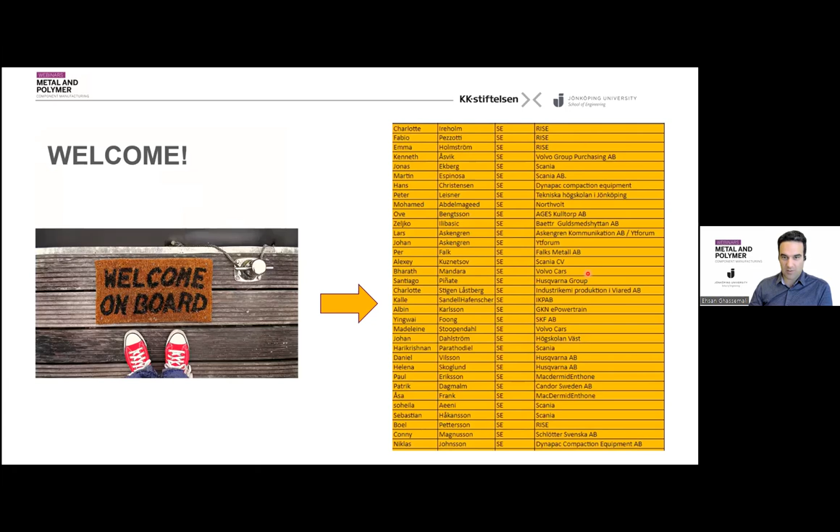As mentioned, this is webinar number 30 from the WebLearn project. WebLearn is a project funded by KK Stiftelsen as well as Jönköping University, with the aim of conducting focused and spot-on webinars related to metal and polymer component manufacturing. Since September 2020 the project has been running, and it will continue until the end of this year. Within our department at Jönköping University, we have a plan to continue the activities based on this project even after the project ends.

We have been conducting more than 30 webinars, almost every 2 weeks since the beginning of the project, related to metal and polymer component manufacturing, and we will have a few more until the end of this year as planned. You can read more about the project at the address provided in the slide, ju.se/weblearn.

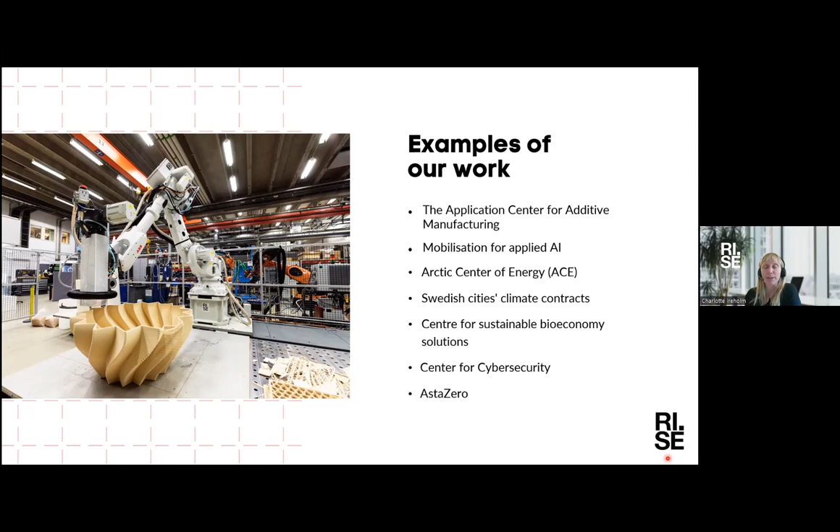Some examples - I mentioned that we have a lot of different test and demo facilities, from AI to additive manufacturing. Yeah, there's a wide range of different topics.

So we are these 3,000 people divided into 5 different divisions: Bioeconomy and health, digital systems, materials and production, built environment, and safety and transport. And materials and production, that's where you find us.

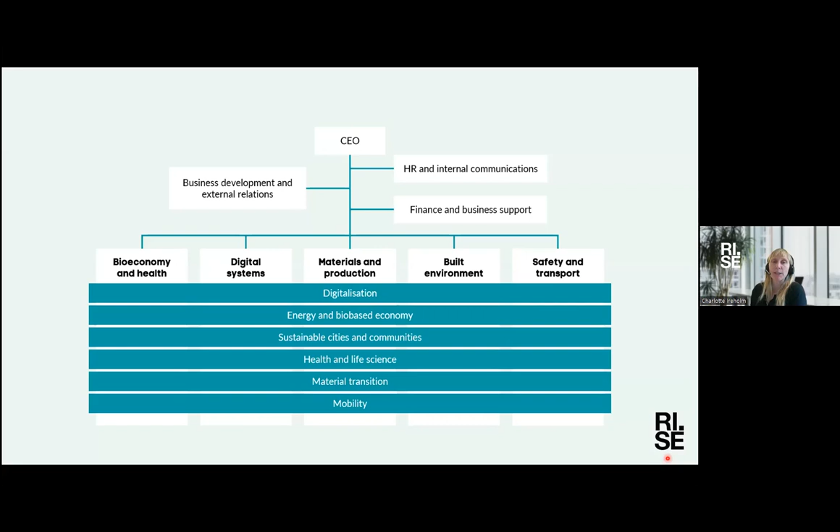So we work with manufacturing processes and more specifically surface technology or surface treatment. And here you find me, Fabio, and Emma.

So me and Fabio represent surface treatment, where cleaning normally is the first part, and then we have following steps with application of different coatings, for example, and also we work with the evaluation of the final surface - different surfaces with different coatings or surface treatments on them.

We didn't say if we were going to present ourselves more specifically, but maybe a few words then. I will give the word to Fabio and Emma before we start on the cleaning part. So I've been working here at RISE for 7 years, more with the surface treatment processes and application of paint and powder coatings and so.

As I said, the cleaning steps, or before you start doing any treatment of the surface, you need to have a proper clean and good surface. And we work with all types of substrate materials, so plastics, metal, composites or so.

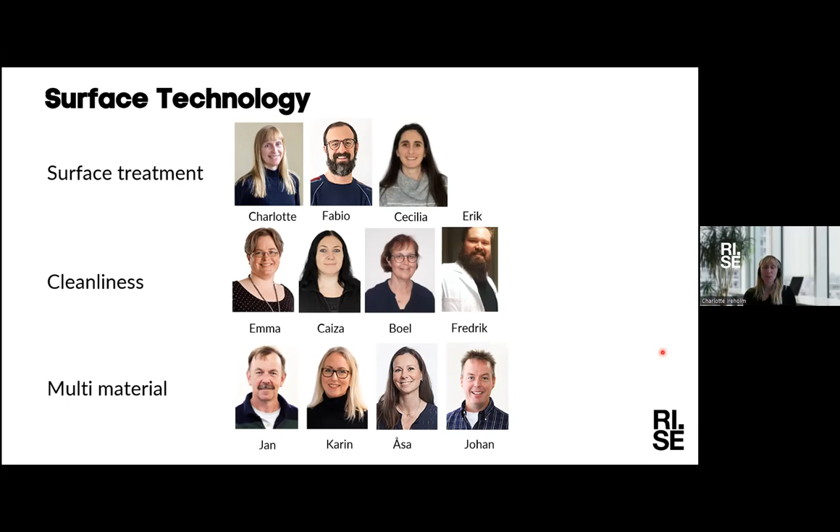Yes, so then I think we can start with the cleaning topic.

I think you have now control. I should have the control. Yeah, and now I can mute and unmute again. That's nice.

Let's see, industrial cleaning. Yeah, now I can change. So, hello everybody. So why is cleaning important?

During a lot of manufacturing processes, you can say that there are different materials that are applied to the substrates during the production. This can be very different depending on the manufacturing process, but it can be from oils, emulsions, lubricants, and those, after the manufacturing process, these materials have to be removed.

Other types of pollutants or contamination that is important to clean are produced during the manufacturing processes, and these can be chips or particles coming from the components or the pieces that are manufactured, or it can also be from the formation of oxides or other species that are produced during the different processes. In many cases, or I would say in most of the cases, all of these contaminants must be removed before the next process or before having the final product.

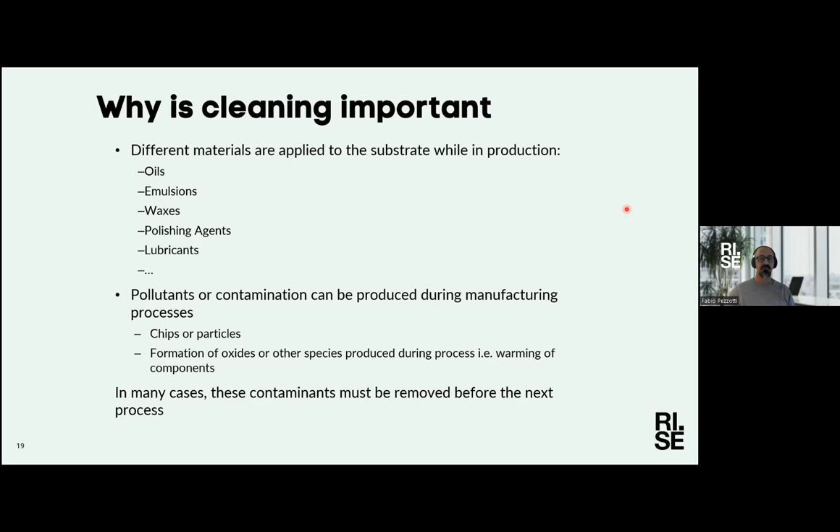Just as an example, this is a little bit of a flow schema of production of gears, the manufacturing process. And as you can see, in all the different processes there are lubricants or emulsions that are added during the process that will need to be removed in the different stages afterwards for cleaning, before the packaging or before the final product is sent to the customer.

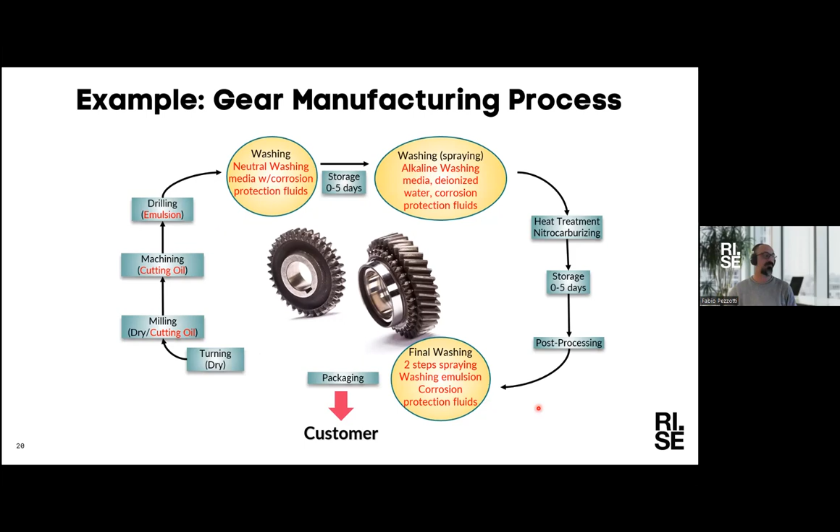It can be from cutting oils, emulsions. It can be, some of the components can come from the washing steps, where some of these previous contaminants are intended to be removed. And also it can be in the final washing steps where you have some washing emulsions or some corrosion protection fluids, especially for metallic components.

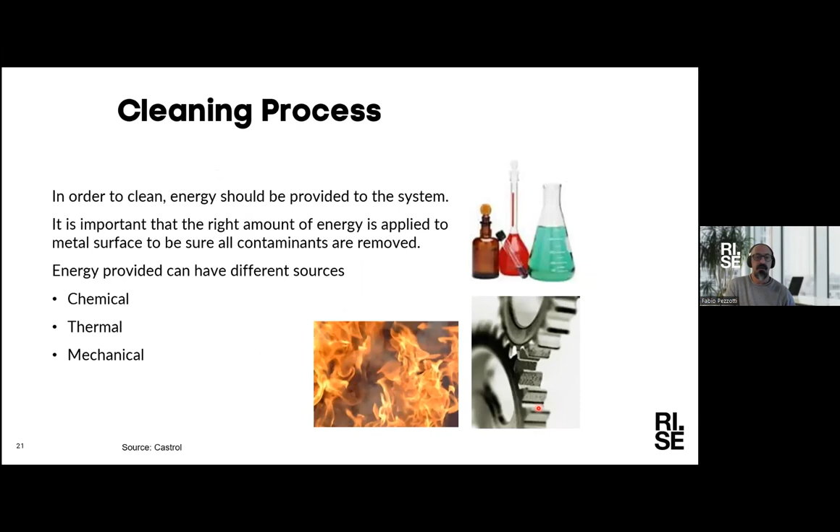So in order to clean or properly clean the components, energy has to be provided to the system, and this energy can be provided in 3 different ways. It can be chemically, thermically, or mechanically.

It is important that all of these 3 different types of energy, together with how long the components or the parts are going to be cleaned, be correlated. The physical forces or the mechanical energy put into the system in order to clean can be applied by spraying, by agitation, dipping. There are different mechanical methods used for cleaning components.

Regarding the thermal force, it is combined with the temperature at which the components are cleaned, and this kinetic energy allows a better cleaning of the systems. The chemical force is a more molecular cleaning, as there are some chemicals that can improve the desorption or the dissolution of some of the impurities in the system.

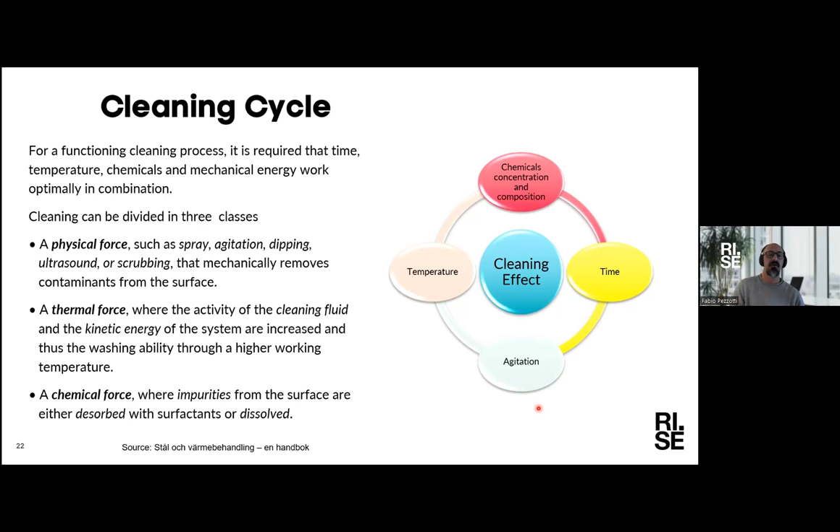So in order to have the optimal or a good cleaning cycle, all these cycles must be complete. The total energy in general has to be more or less the same, but it can depend or vary depending on which type of contaminants, which type of components. At the end, the total amount of energy should be more or less the same.

So you can split these different types of cycles or stages depending on the needs of the component. In some components you might need more chemical washing or chemical energy, in others you might need more time, but at the end the cycle must be complete and it should use approximately the total amount of energy.

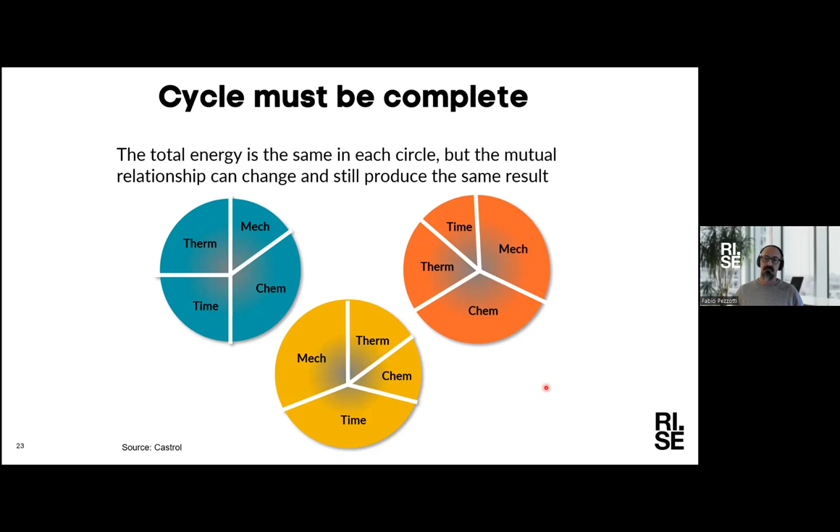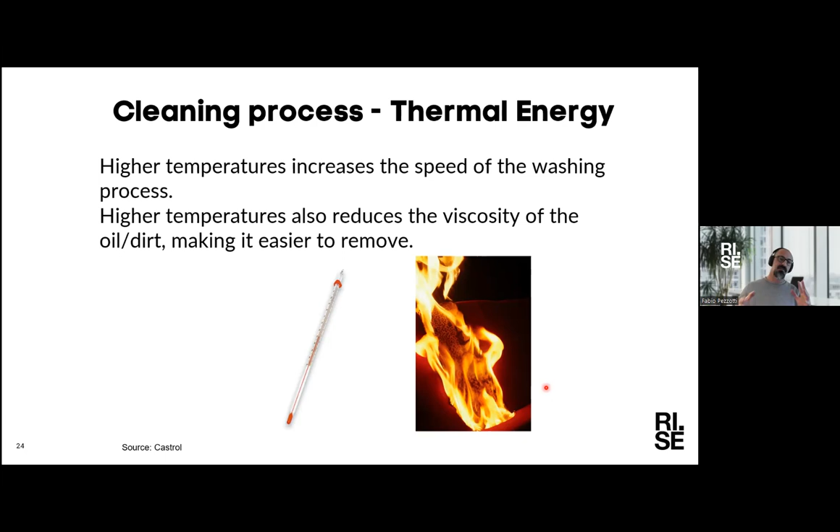Regarding the thermal energy, it's very related to the temperature at which the cleaning process is held. At higher temperatures it increases the speed of the washing process. It can also reduce the viscosity of some of the contaminants, in this case oil, dirt, and make it easier to remove. One of the drawbacks with thermal energy is that higher temperatures mean you will require more energy to the system, and this could not be the most energy efficient. But as I said before, it's all a balance between the different stages in the cleaning process.

The mechanical energy used for cleaning can come from different types of process: spraying, shaking, brushing, or ultrasound. There are also other mechanical methods that can be used, and it will depend a lot on which type of process you are running, which type of components you are running.

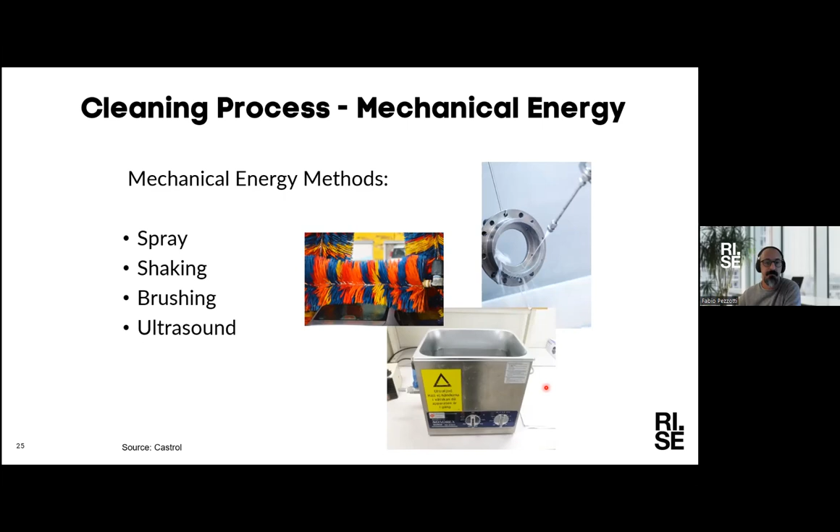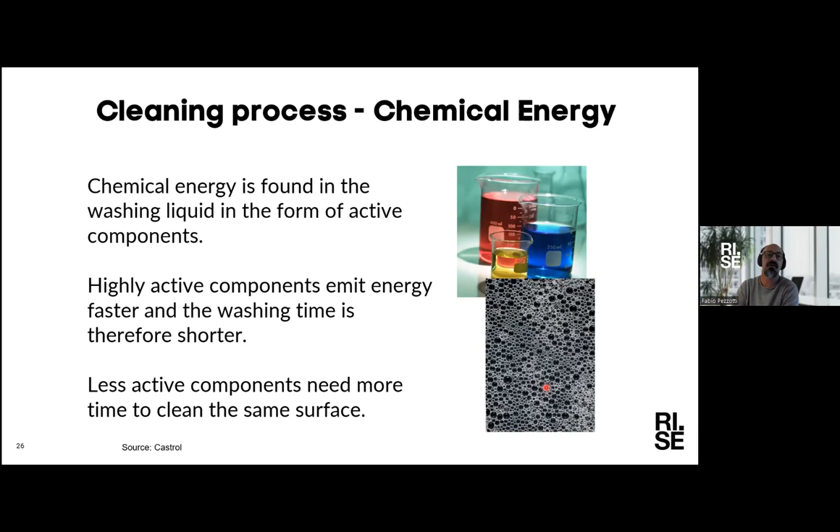Regarding the chemical energy, basically it is found in the type of washing liquids you are using, and how they interact with the contaminants, oils, or emulsions on the surface of your component. Depending on the activity, or how they give this chemical energy to the system, they can be more active components or less active, depending on the chemistry and the compatibility with the system.

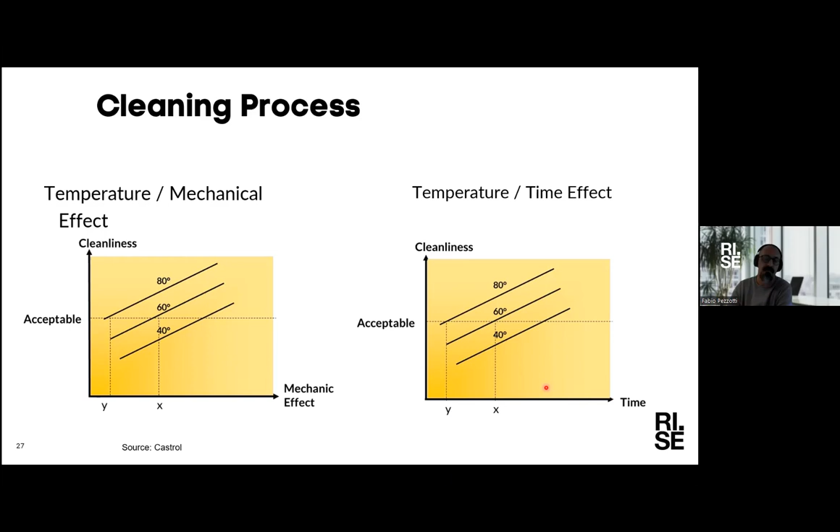These 4 types of cycles or stages need to be correlated. There are correlations between the temperature and the mechanical effect, and one should find which is the most acceptable, where to put your process parameters in order to have the best or most acceptable cleanliness. The same runs for temperature and time effect. Depending on how much or how little time you have in the process, you can achieve a more acceptable cleanliness.

Something regarding the chemical energy that needs to be provided to the system has to do with the strength of the binding of the contaminant to the surface. How strong is this contaminant attached to the surface? This bonding or this energy will depend on the distance between the substrate and the contaminant - if it's in the outer layer, in an adsorption layer, or in a reaction layer. So the chemistry of the cleaning fluid has to be in accordance with breaking or reaching this amount of energy in order to get to the different layers.

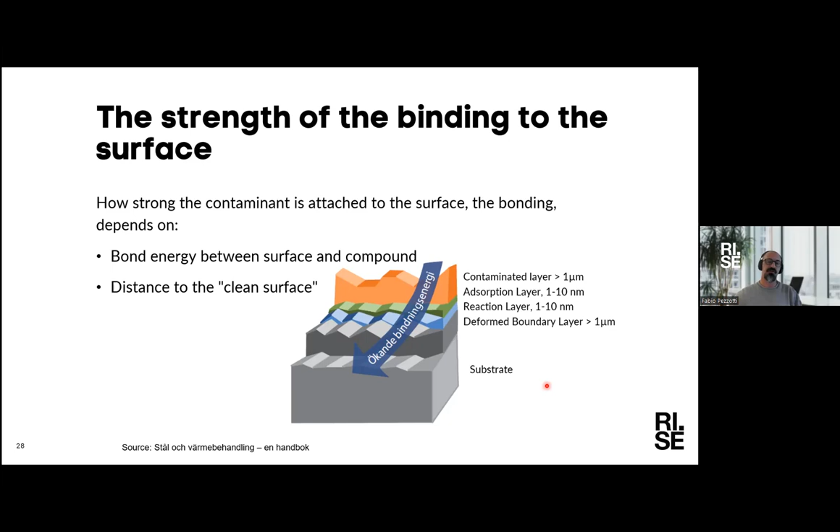Once we understand the 4 different stages for the cleaning process, it is important to select and design the cleaning process that is more suitable to our component or to the parts we want to clean. This depends on many variables, like the previous step - where does the component come from, what was the process before, and what type of contaminants is it bringing to the washing step?

How many components are there? What's the volume of the component? What's the amount of contamination? Do you want a continuous or a batch process for cleaning the components? Related to the type of contamination from the previous steps, it can be either organic, salt contamination, or particles.

One should also consider the environmental and health issues of the cleaning process, in terms of water consumption and health risk or exposure to chemicals, either for users or operators in the factory. Also, the energy efficiency of the process should be considered - this involves the process time, how long components stay in the washing or cleaning process, and the temperatures at which the processes are held.

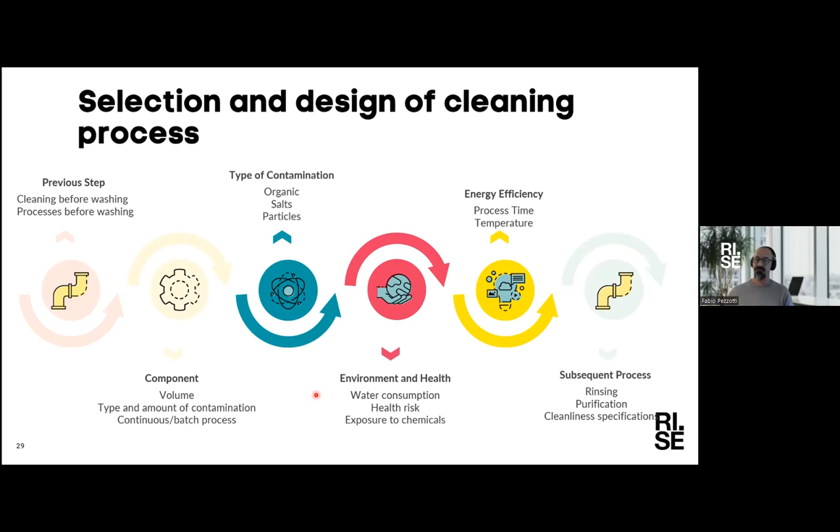What can influence the cleaning efficiency? Of course, there are many parameters depending on the type of process and the type of components or pieces that need to be cleaned. But first of all, it's what types of contaminants are to be removed. We'll give more detail in the next slides.

What's the amount of components or the volume that needs to be washed? What are the cleaning requirements regarding the subsequent treatment? The composition of the contamination on the surface, the geometry and design of the component, and the surface mechanical properties - the resistance of the surface to the cleaning agent.

That has a lot to do with what I explained earlier about this chemical bonding, or how these contaminants attach, or how much they like to be on the surface, and how difficult it would be to take them out. And the condition of the bath, which could include parameters or contaminants that one can have in the bath.

So, how clean the component is at the end will also be determined by whether the bath is clean or if it has impurities. So it's also important to keep an eye on and check how the baths are contaminated.

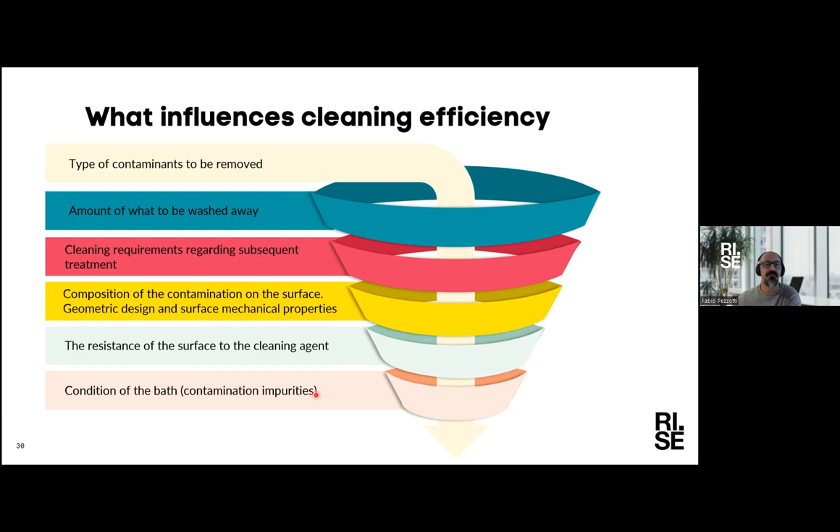Regarding the impurities to be cleaned away, as I said, they can come from different sources. It can be from the washing liquids, from additives, emulsions or oils, lubricants added to the process, or they can come from the manufacturing process itself - particles, chips, or small particles that can interfere with the system and bring problems in subsequent processes.

Regarding organic substances, it could be oil, greases, emulsions, and basically most of them come from additives, cutting oils, or emulsions used during the manufacturing process. These films normally stick to the surface of the components, and depending on the nature of the substances and the cleaning process, it might be more or less difficult to take them out.

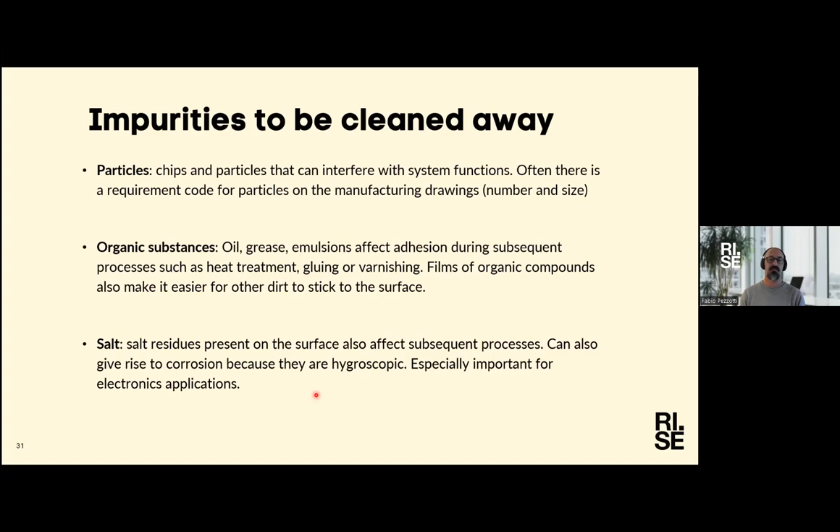Salts are basically formed on the surface during subsequent processes, and it's important to remove them as they can give rise to corrosion. That's particularly important for metallic components and for electronic components.

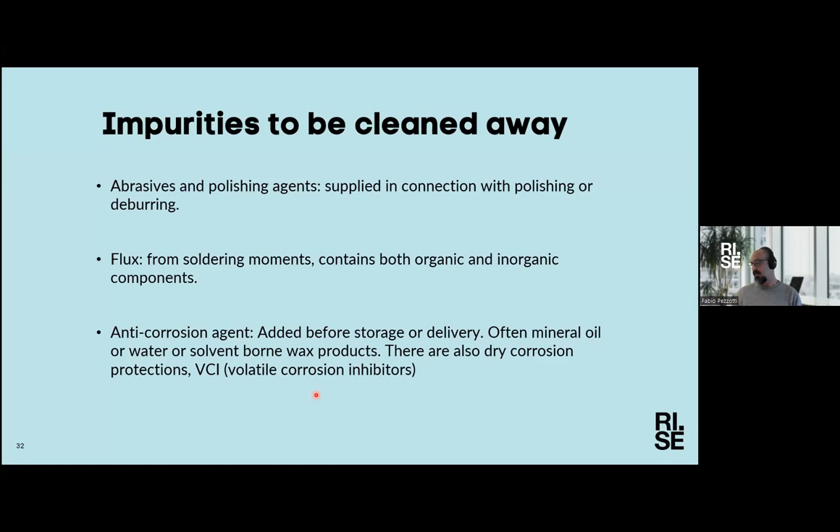Other impurities that need to be cleaned away are abrasives or polishing agents that are also used during manufacturing processes, as well as flux that is used when soldering different components. And during different steps of the manufacturing process, you might require anti-corrosion agents to preserve the parts during production and also at the end of the production cycle.

Concerning the requirements of how clean a component or part must be, it's very difficult to define, as there could be many different standards or parameters that tell you how clean a component is. It depends on the manufacturing process and on the end use. There are different guidelines depending on the type of process and the use the component will have. It's difficult to define one cleaning standard, and it's also difficult to measure, so there are different limits depending on the type of process, component, and end use.

We can also add something about storage. Even if you manage to define that a surface is clean enough, sometimes you need to store the component or send it somewhere before the next process step, and then you don't know if it's still clean. So it's always a problem, since it's not easy to define, there's often an issue with storage and handling of parts after cleaning and after determining if it's clean or not. This makes it more complex.

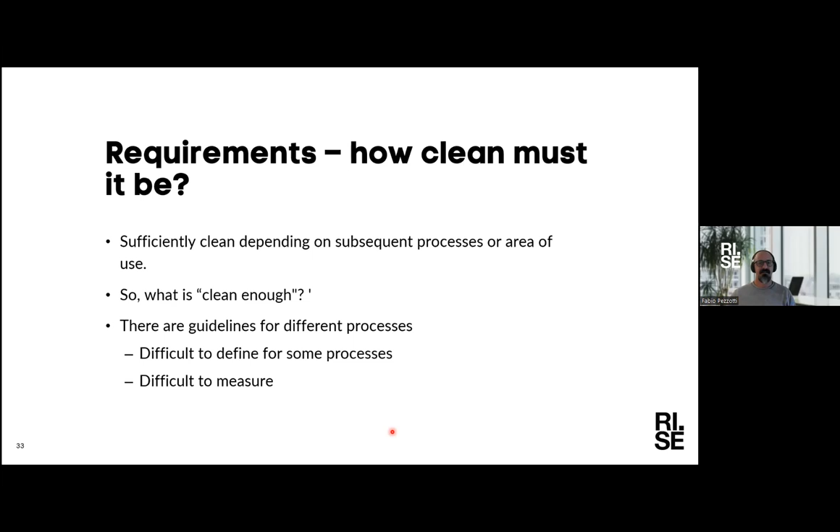As an example, this is a classification of the cleanliness grade, corresponding to ISO standard 8501, which, if I remember correctly, is for metallic substrates. As you can see, there are different grades from 0 up to 3, and each grade has different limits for different contaminants, either oil and grease, salts, or other standard fixed contaminants, or loose contaminants, ranging from oxides to slag, or more loose contaminants like dust or dirt.

Again, this is just a reference. A company or manufacturing process might require different cleanliness grades or limits for their components. So a lot of companies can use this as a reference, but they can also have internal standards or limits for the different kinds of particles they require. This is just some of the examples; they can have more parameters in terms of which type of particles or contaminants they want to measure.

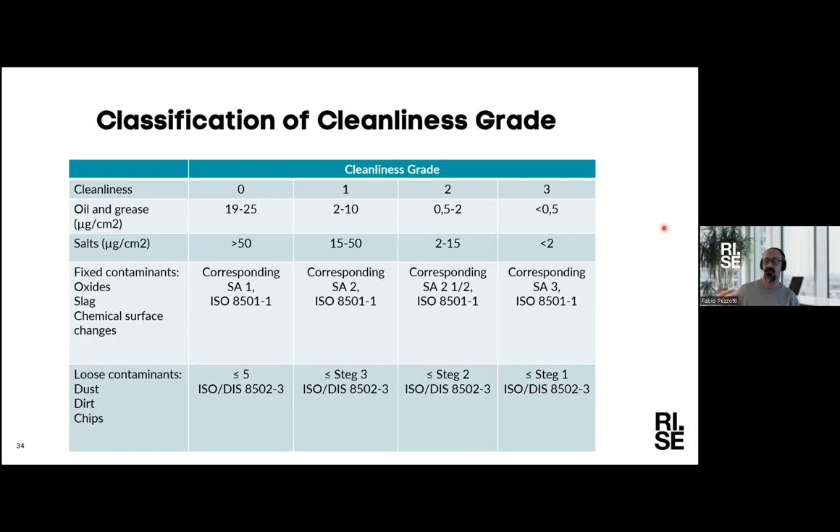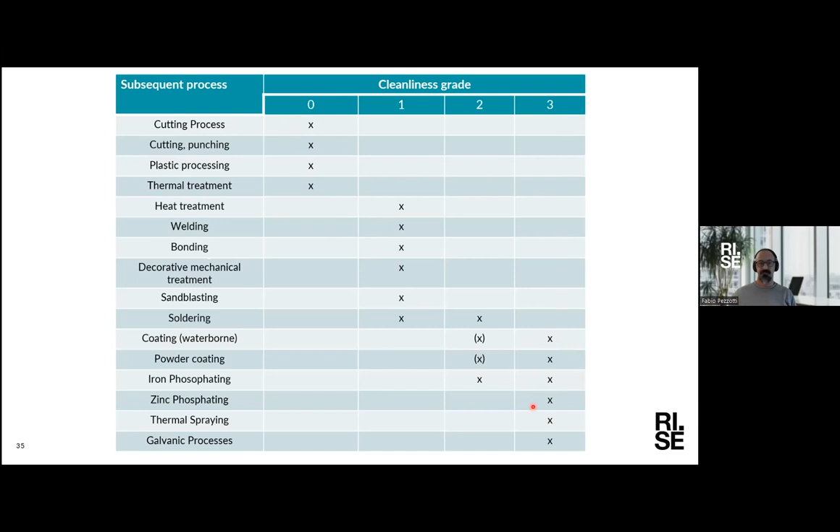Regarding mechanical methods for washing, there are different methods like spraying or dipping, ultrasound - though I think we have a slide for ultrasound cleaning next. Basically, it's putting mechanical energy into the system in order to remove the contaminants, whether they are loose or fixed to the surface. That will also depend on the chemistry and on the other two parameters: time and temperature.

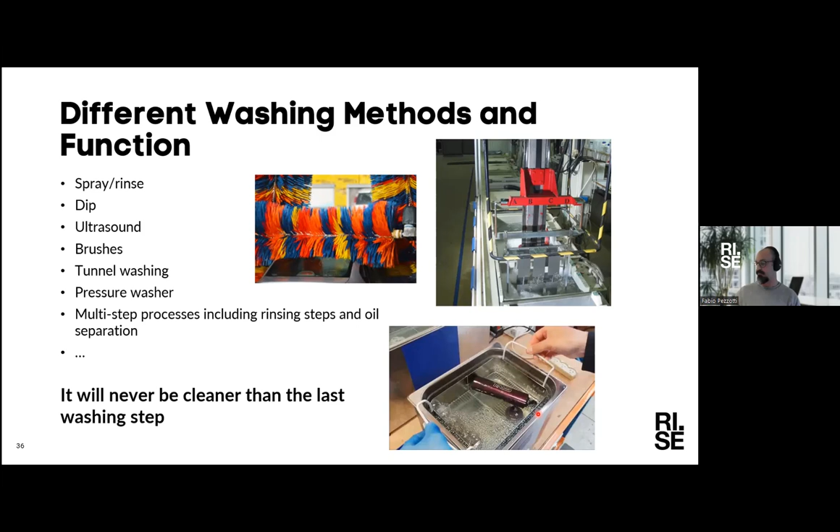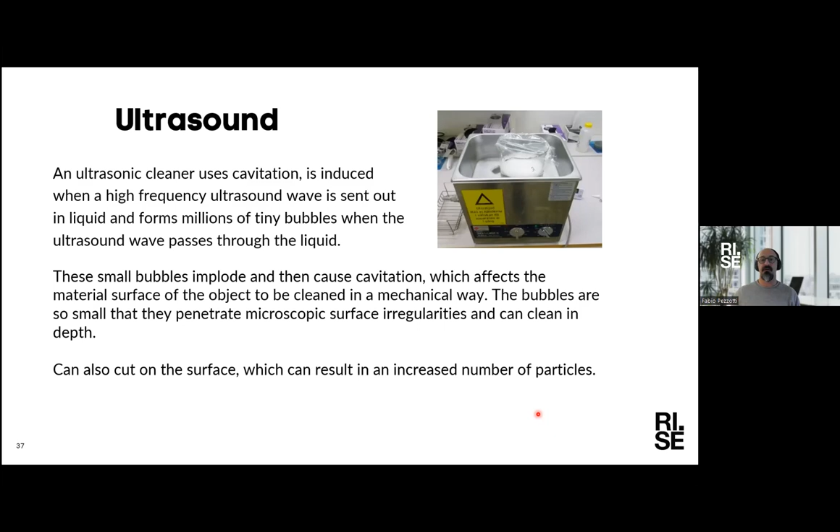I think we have a couple of slides on mechanical cleaning. Ultrasound uses cavitation for cleaning. It's a high frequency ultrasound sent into the liquid, forming bubbles, and these bubbles implode, producing cavitation. This can be a very good or bad cleaning method depending a lot on the component and on the chemicals or impurities that need to be cleaned away. But it has some limitations in terms of volume, or what type of components can be put inside.

Another mechanical method used quite a lot in manufacturing is tunnel washing, where components are hung up in a washing tunnel, as the name suggests, and sprayed - most of the time they are sprayed. Sometimes in the final stage of the tunnel washing, there can also be drying of the components. Besides cleaning, these tunnels can also be used for phosphating or even for pre-treatments.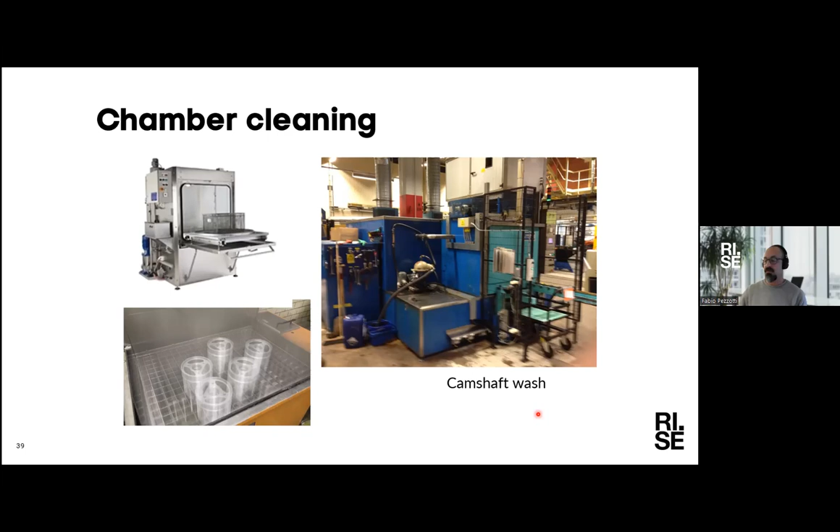Then we come back to the cleaning circle in the middle here. As Fabio mentioned before, we have thermal energy, mechanical energy, time, and chemistry that has to add up to 100% and then result in a clean surface. But the choice of how we choose the different parts, of course, has impact from other parameters or sources.

It depends on what type of application we are looking for, what type of substrate we are cleaning, if it's plastic or metal, and also the level of dirtiness, or the level of contamination, how much contamination, what type. That has to take into account what chemistry we will use and how much mechanical force we need for the cleaning.

And also, we mentioned the environmental impact - both the work environment for operators, but also the sustainability part with pollution and these things. And also, of course, the following process steps, what is happening with the part after the cleaning step. And last but not least, the economy - how much thermal energy do we have, can we afford, especially now when the energy price is going up? So a lot of different things set our cleaning circle parameters.

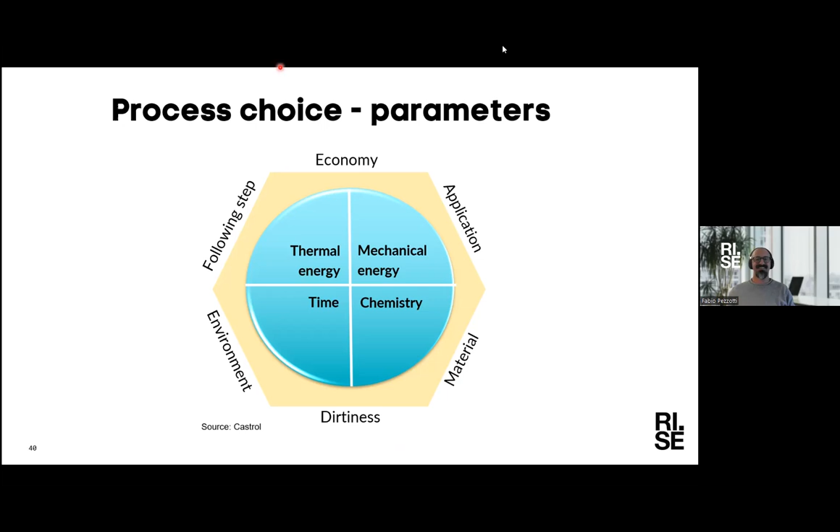And now I think it's me that has control, right? Yeah. So I think the next slide is more or less some examples that I maybe already mentioned.

Substrate material impact, so steel or metal, plastic or composite, what type of contamination, and subsequent process steps. These parameters make our choice of process, as we saw on Fabio's last slides. What type of washing equipment we can use is also then steered by these parameters.

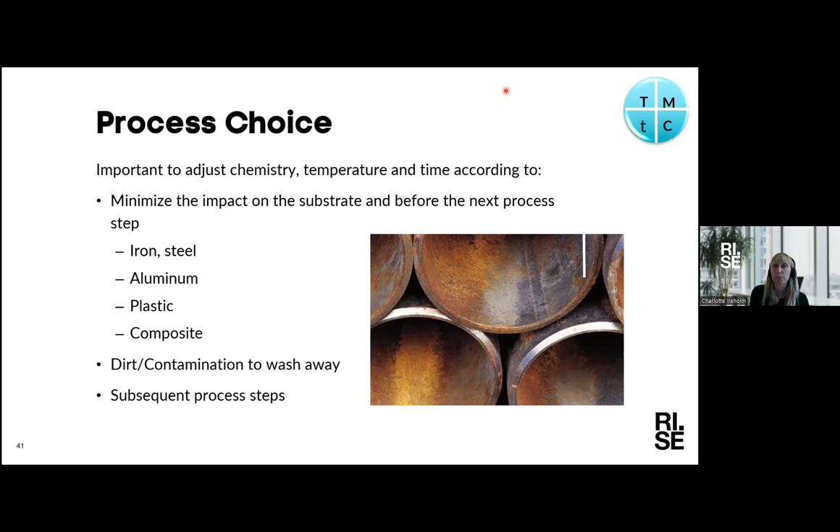And also the type of cleaning equipment or industrial cleaning machine is a combination of all these four parameters - can be mechanical and chemical at the same time. And the chemistry of the washing liquid that we use can be more or less complex then.

First of all, we have to look at what type of contaminant we are to wash away, if it's oil, wax, or grease from previous process steps, or if it's salt particles or other contaminants. So we have solvent-based and water-based cleaning liquids, and as you see in the picture, mainly solvent and surfactants in the solvent-based one, but more complex formulation in the waterborne example here.

So except for water, which is the majority of the content, of course, we have surfactants and alkaline components and others here with a little asterisk, for example, corrosion inhibitors. And if we have a water system, you might need to add some biocides, or other additives, so to say.

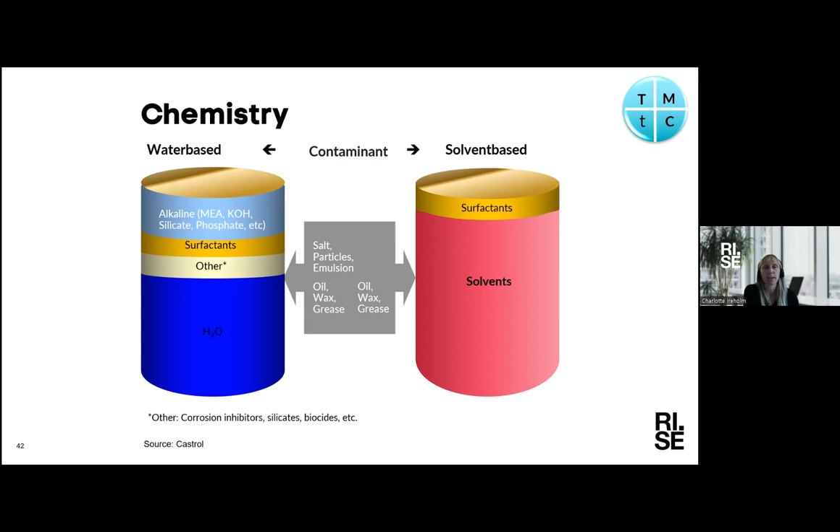But if we look a bit more into the surfactants and why they are needed, you can see on the next slide. So a surfactant is a surface active agent, more or less. Normally it contains, as the schematic picture shows to the right, a hydrophilic and hydrophobic part, which is good in a water-based system.

Then if you have surfactants, the hydrophilic part is in the liquid phase in the water, and then the hydrophobic part of this surfactant seeks a hydrophobic surface. And if the contaminants you want to wash away are hydrophobic, then the surfactants adhere to that surface.

And then with the help of the other parts of the wash or the cleaning cycle, for example mechanical action or temperature, it adheres there, and then the contaminants are covered with surfactants and washed away, so the surface is then clean. To simplify this a bit, but that's the surfactant part.

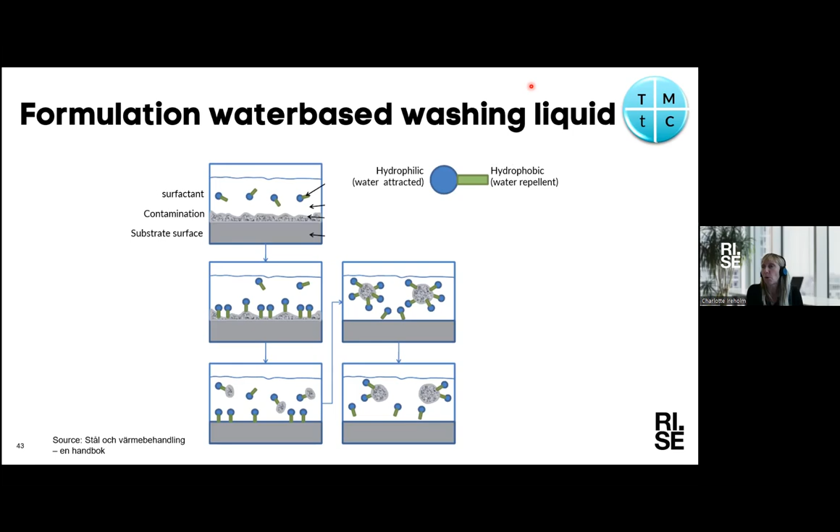Temperature is one of the four parameters, and it influences the drying time. If you have a higher temperature, the water will leave faster, and how long the water stays on the surface has an impact on corrosion. There's a limit, of course, both in energy efficiency and for the material being washed, how high a temperature you can use in your washing system or cleaning process.

Temperature can also be related to the efficiency of the cleaning chemicals—they can be more efficient at higher temperatures than at lower temperatures.

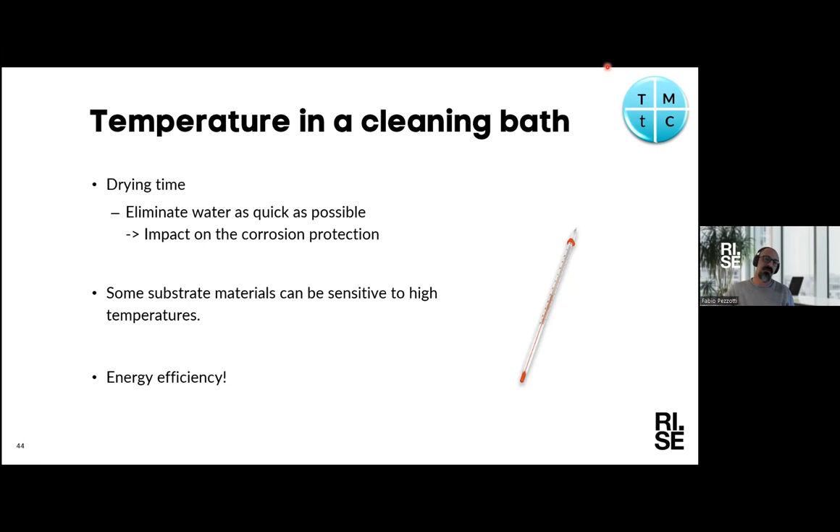It's the same with washing time. If you have a process, you can't have too high or too long a time to be efficient, so that steers how the washing time can be. This can also have a large impact on the substrate and on the chemical used. But for your specific system, it's trial and error to see how short you can make your washing and to be more efficient. There is a limit somewhere, but it can be difficult to calculate in advance—it's normally trial and error that is valid.

We can take the next topic. We've been talking about washing liquids, and often you have a bath. If you have an open bath, some of the water evaporates, so you have to adjust and add water, and some of the additives and chemistry in the bath get used during cleaning. You have to add that during continuous production, for example, to make sure the cleaning bath is in balance and fresh enough to take care of the contaminations you want to clean away.

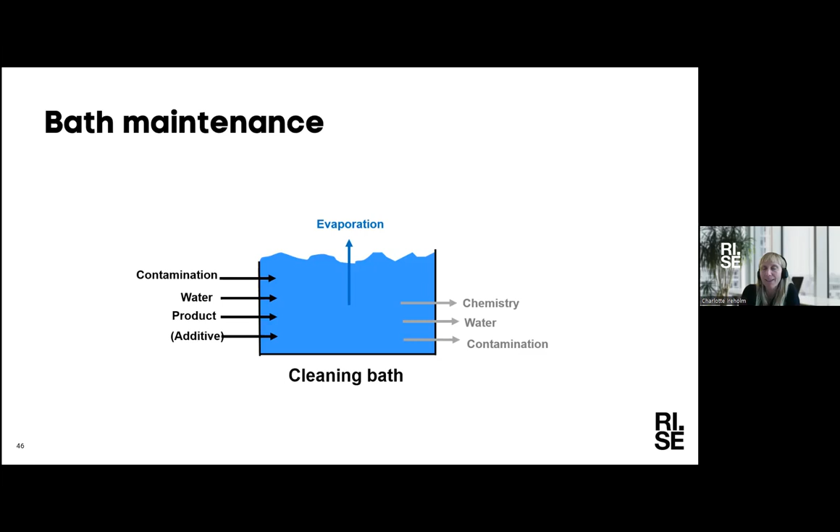I don't think I mentioned much more about that. But in your washing, if you have a liquid washing system, water quality is critical, depending on what type of water—hard or soft water in your tap water—depending on where you are in the country. You have to add different amounts of chemistry or softeners, so to say.

Also, if you have a water system, bacteria and microorganisms might require you to add biocides or other chemicals to avoid growth. The tendency now is to try to avoid the use of biocides as much as possible, so the challenge is to introduce different ways of controlling bacteria or microorganisms in the water or process baths to keep them as clean as possible. Here, temperature also plays an important role.

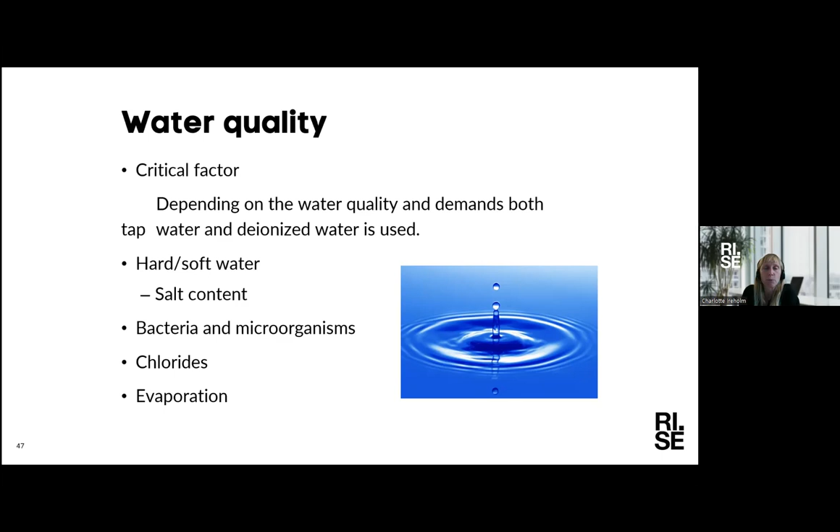So if we look at the next slide, what problems can occur? Corrosion is one thing, of course. If you have metal substrates, it can depend on the cleaning bath not being fresh, or really high humidity in the process environment when taking up the parts and sending them to the next process steps, or even between cleaning steps. Normally you don't have one cleaning step, you have several in a series. Maybe you had to add some corrosion inhibitors or change the level of that.

Other problems that can occur with cleaning, of course, are if your product is not clean enough—there can be millions of reasons, but often the cleaning bath is not in good shape, or the surfactant concentration is too low, so you don't have the balance in the bath as wished, or maybe even the wrong choice of cleaning agent. Maybe something has changed in the process—it can be that the oil or chemicals used in the previous step have changed, and then suddenly the cleaning step isn't working anymore. So the cleaning cycle parameters always have to be tailor-made with the chemistry and so on to the substrate, materials, and contaminants you have to wash away.

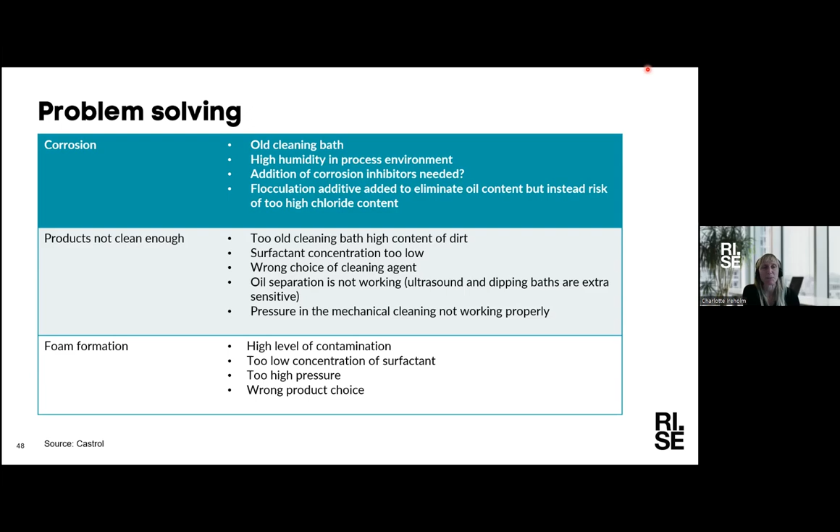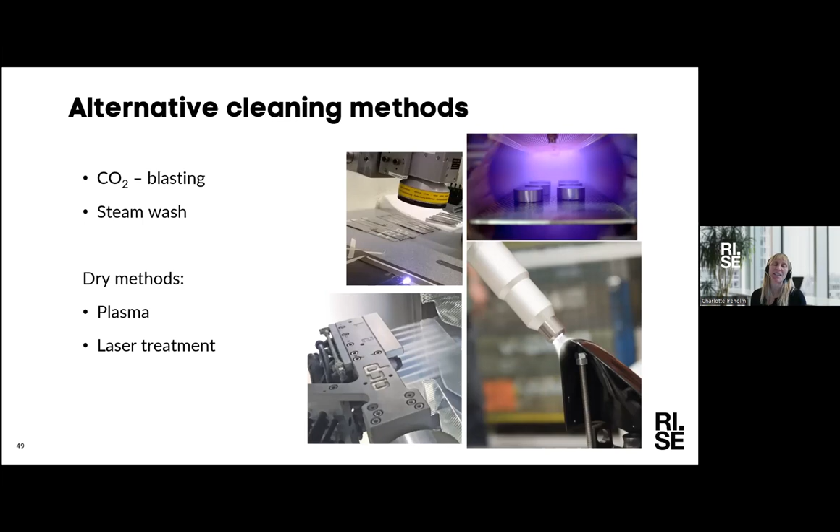So that was about cleaning processes mainly based on liquids, but there are of course other cleaning methods to use—for example, CO2 blasting or steam wash. There are also dry methods like plasma or laser treatment. Depending on the type of process or components, you can select other methods; for example, these dry methods don't use any water or chemicals. So there are pros and cons to all processes, of course. But we will talk more about plasma after Emma has talked about particle cleanliness, because we have one or many research projects going on about that—one we will talk about later.

And then this evaluation, or the problem with finding out if a surface is clean enough, we had one slide on when is it clean enough, and it can be tricky to find out, that's for sure. There is of course visual inspection to try, either manually or automatically with some vision system, to see if it's clean enough for your process.

Measurement wise, we have some examples, there are more. For example, to measure the surface free energy of a surface, what you measure is the contact angle. You have water and a non-polar liquid, and from that you can calculate the surface free energy. If you have a higher surface free energy, your water spreads out more easily on the surface, so you can see if you have cleaned away at least oil or other contaminants. But it can be difficult.

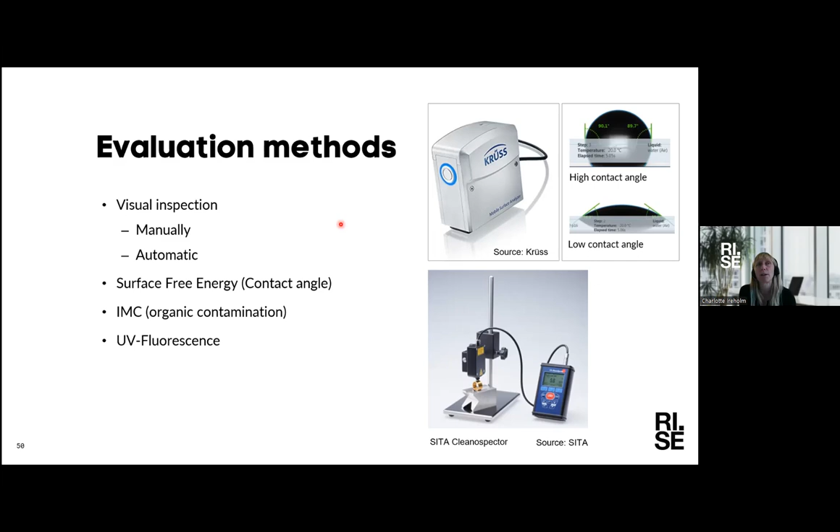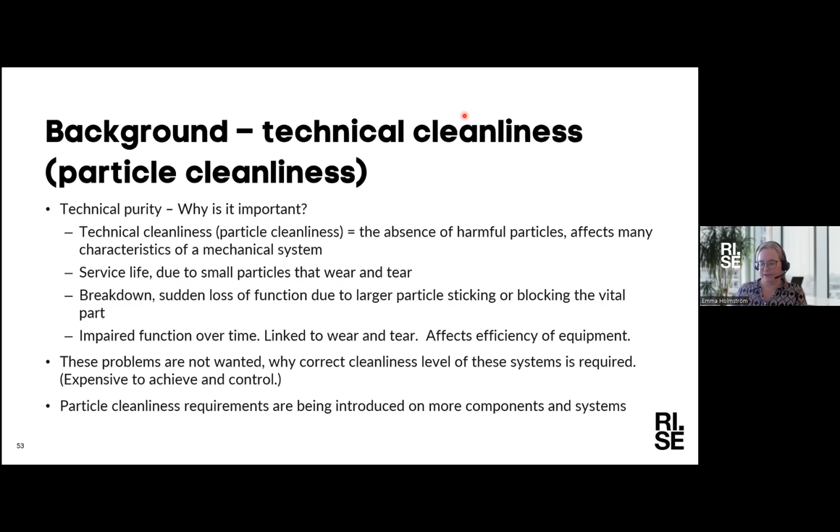Cleanliness requirements are introduced on more and more components and systems. The development has been in the automotive industry, which is a big part of what I work for, aiming for more power and lower weight that lead to tighter tolerances and higher demands on cleanliness. For example, a typical engine's power has tripled since the 70s, while fuel consumption has decreased significantly. To achieve this, the requirements have increased.

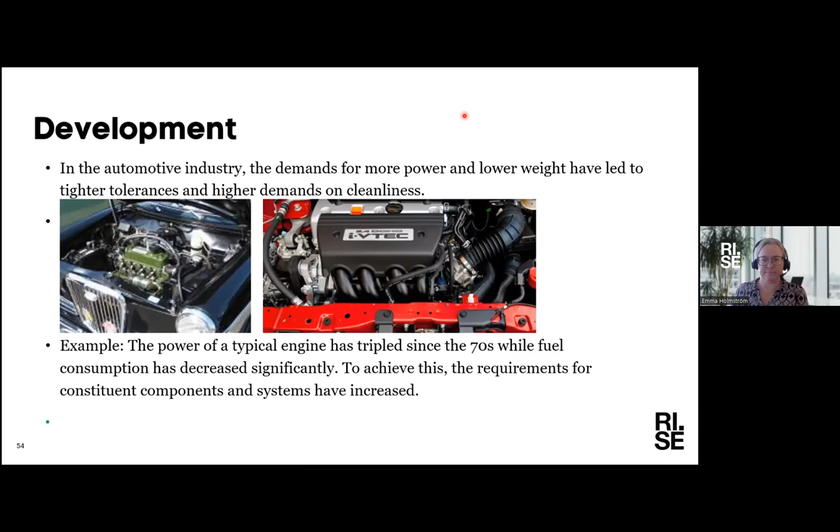There are also several areas that have driven the development in particle cleanliness. That's legal requirements, for example lead-free bearings, which are more sensitive than bearings with lead. And reduced fuel consumption, where you want lower emissions. New security systems, for example ABS.

Increased service intervals, higher demands on sensors, and you also have electronic systems with cameras, lasers, and the engine nowadays.

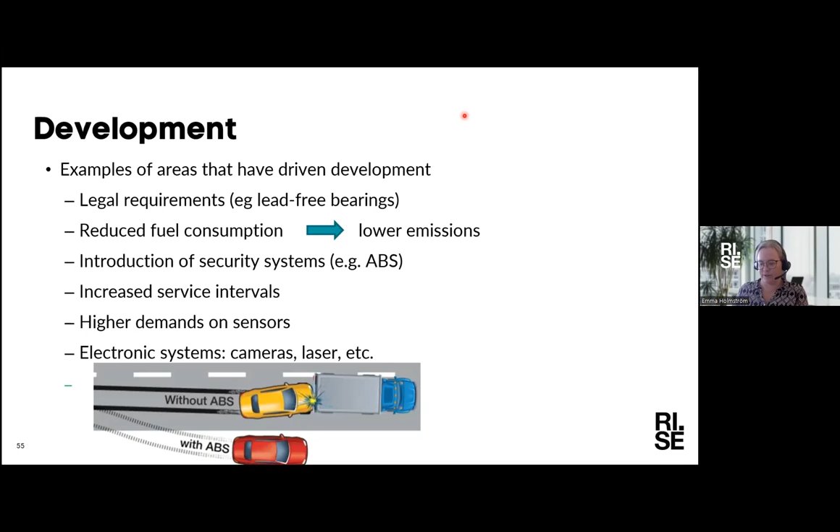The status today is that companies have cleanliness requirements on components and systems in critical areas, such as oil systems in an engine or in a fuel system. Usually, companies have developed their own standards to be followed when analyzing, or reference general standards, often a combination of this.

The standards inform about how the analysis should be carried out to extract particles from the components and how to calculate. Cleanliness demands are often not public, and more and more systems have cleanliness requirements.

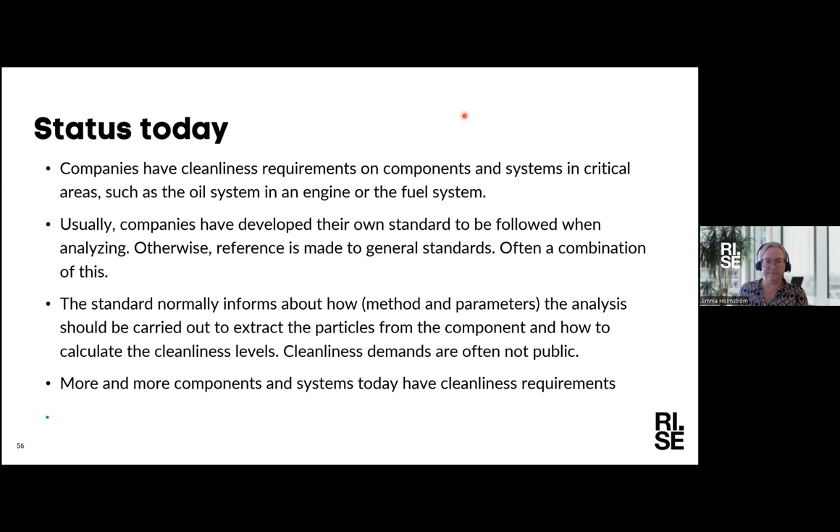We also have a network within this area. It's called Center for Cleanliness, or Centrum för Renhet. It's a membership network which highlights this issue of cleanliness.

We perform projects in the field. It's member funded, so you get more for your effort, and you can seek public funding with this network that brings together several companies working on it. Strategic intelligence, seminars and trainings.

It was started in 2014, I think, because it was a common problem for many industries with particle cleanliness. It was important to have an active forum for networking between different companies and to identify which particles and pollutions to avoid, and to know the consequences.

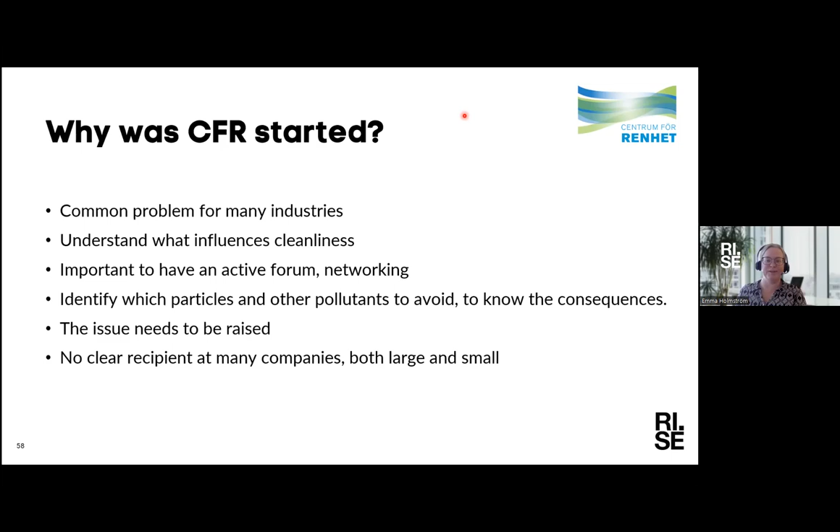The issue needed to be raised, and there is not always a clear recipient at many companies, both large and small, for who is working with these issues. So therefore, there was a need for a network.

The companies in this network are manufacturing companies, subcontractors and others, and companies working with surface cleanliness, fat and oil, and so on.

It's been running since 2014, and it's driven by us at RISE.

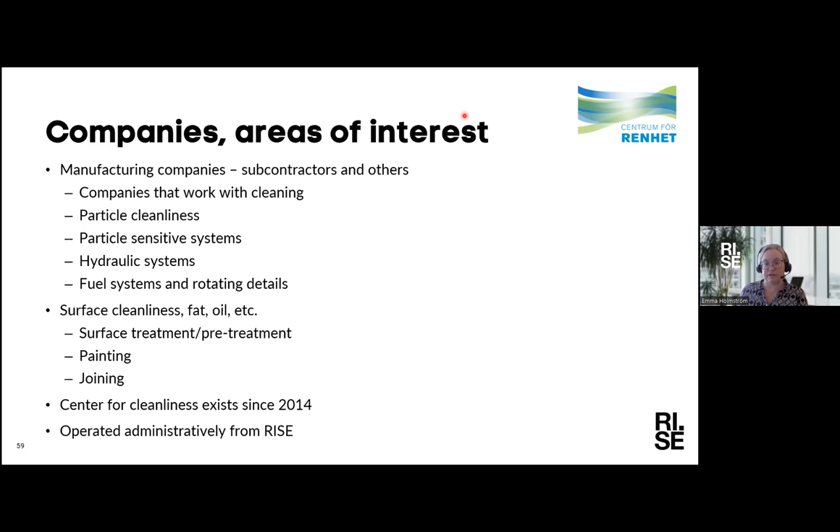I'm going to show you—no, this is another slide. I thought I was showing the member companies.

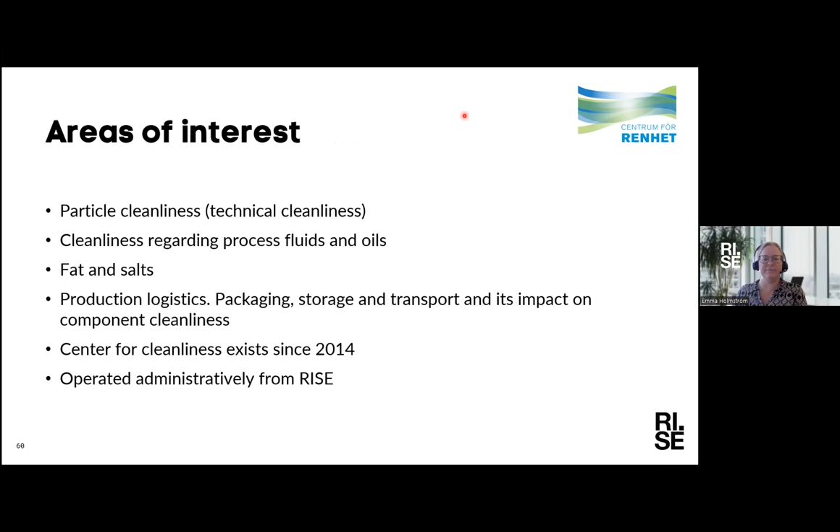Its areas of interest are particle cleanliness, cleanliness regarding process fluids and oils, fat and salts, production logistics, packaging, storage and transport, and its impact on component cleanliness.

The reason this was started is that you have a common problem. We have particles in a fluid system, and the company has a complete set of requirements. They have a complete system, set the requirements for the individual components, and the subcontractors need to meet these requirements, but they don't really know why the requirements are set.

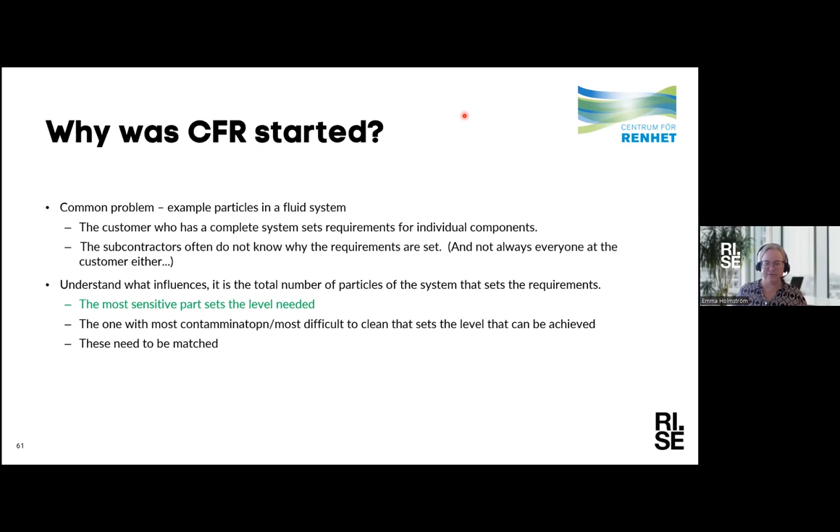So that's a problem, and to understand what influences the total number of particles sets the requirements. The most sensitive part sets the level that is needed, and the most complex part sets the level that can be achieved, and these need to be matched, which is quite hard actually.

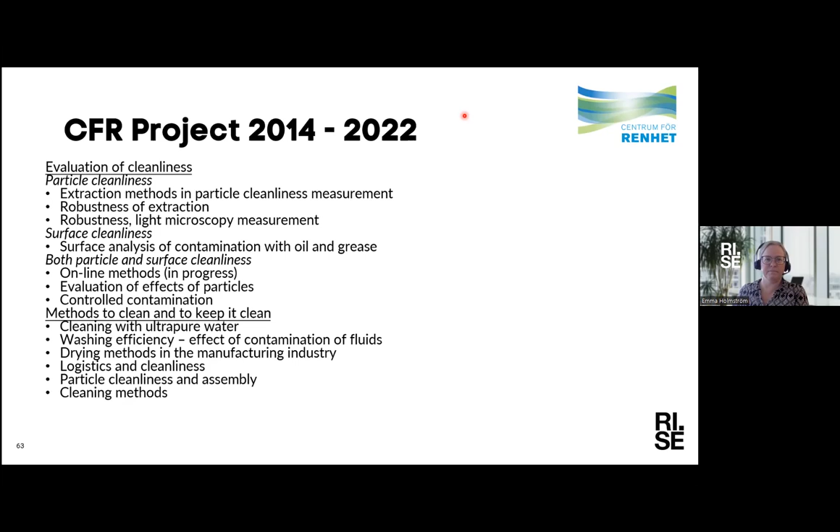At RISE, that's what I'm going to tell you about regarding Centrum för Renhet. We also have testing of technical cleanliness, which is done in either of our extraction cabinets.

One is solvent-based and one is water-based cleaning, and we also have ultrasonic equipment if that kind of extraction is needed. Particles are collected on a filter and tested in a microscope. Here you can see a picture of a fiber that is detected in the microscope.

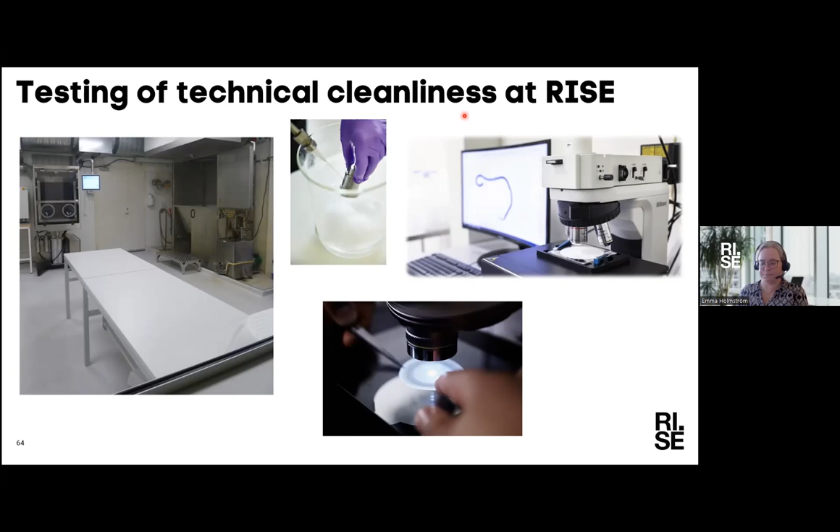We have one question or comment that I see in the chat, which refers to total absence of harmful particles, or the amount that allows the system to work according to a specification. Maybe you can comment on that, like how do you come to the design and the amount of contamination you can allow in the system? Can you test this in some way, or is it some guessing?

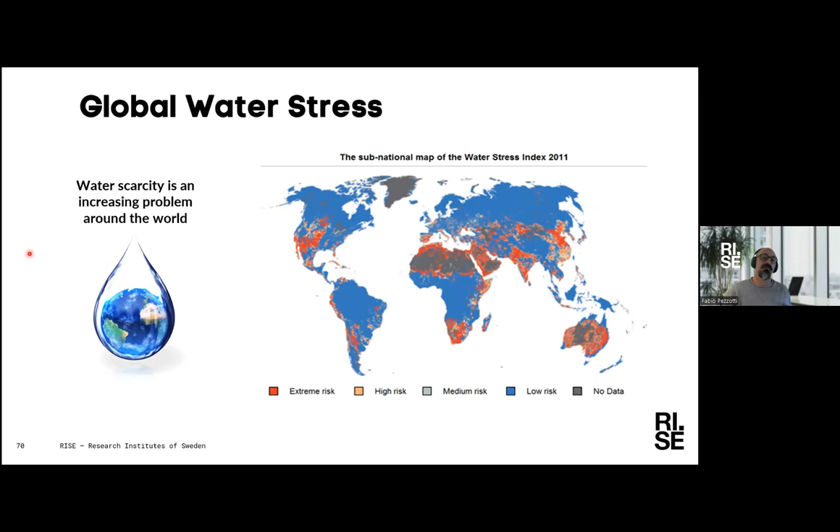So the idea of this project is the smart recirculation of water and process fluids in the metal manufacturing industry, to try to decrease the consumption of tap water, chemicals and energy, and generate less waste into the metal manufacturing processes.

It's a 2-year project that started in November last year with a total budget of around 10 million crowns, financed by Vinnova. We're going to be focusing on different processes in the metal manufacturing industry, like cutting, washing, heat treatment, and cooling water.

We are going to be focused on some of the water and fluid parameters that are necessary in the process baths or in the water treatment facilities that have an impact on the cleanliness, on the washing, or on the heat treatment processes. These are some of the parameters we're going to be looking at, like hardness, as it might affect the efficiency of the process fluids. Calcium can affect the formation of foam.

pH, chloride content for corrosion, how to check the oil content or how to measure it, and different surface tension agents, and how to have a bacterial control or a proper bacterial control in the different processes.

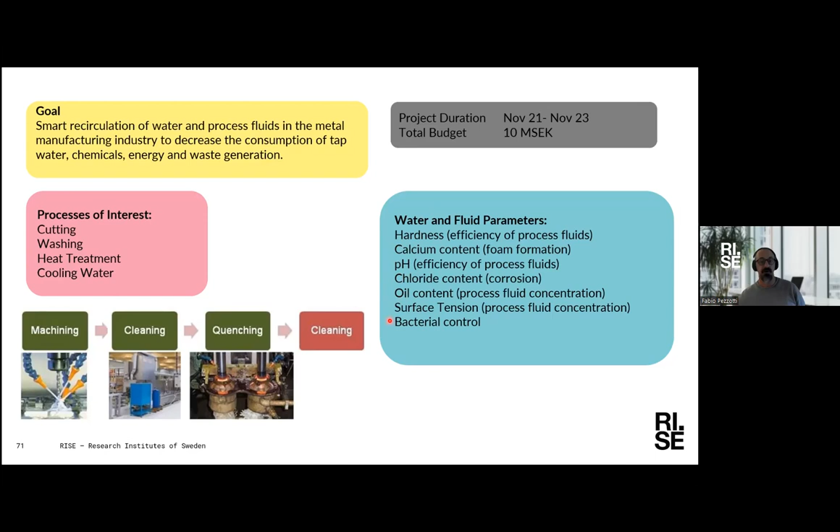The consortium of this project is basically 4 big groups of participants: the OEMs, that are the ones that have the metal manufacturing facilities, chemical suppliers, equipment and sensor suppliers, and from the research side, it's RISE that is involved, and IVL, that I don't... it's Institute for...

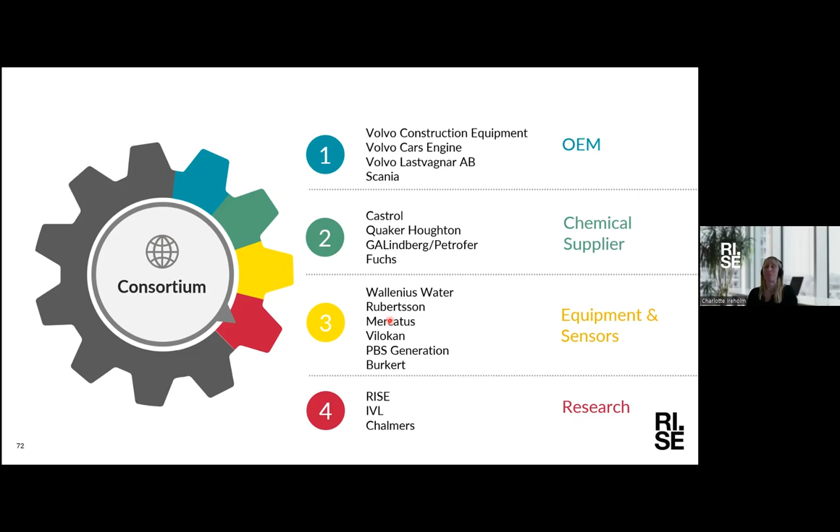Svenska Miljöinstitutet, IVL, and Chalmers. What we want to do is show a general picture of how the processes are done now.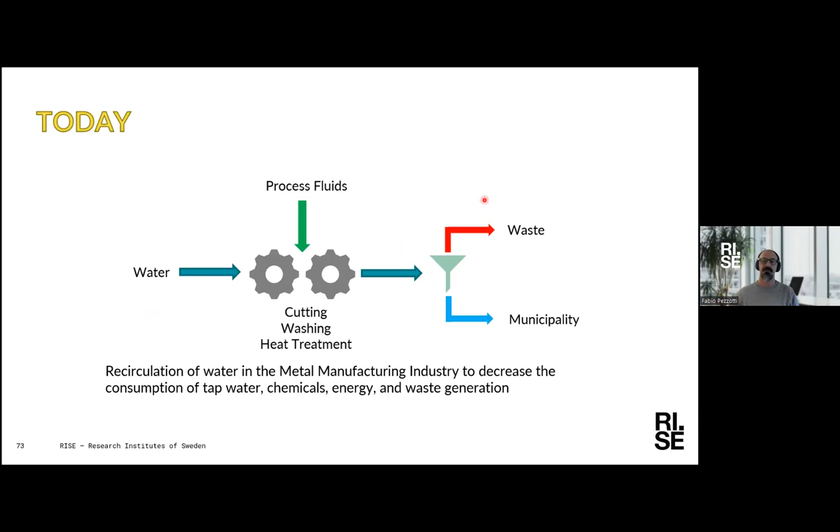You have different types of processes: cutting, washing, or heat treatment. Water and process fluids come into the system, then get treated in a certain way in order to separate fluids, oils, and all these emulsions and contaminants, producing treated water back to the municipality.

What we want to do is, in a certain way, close the loop, try to reduce the amount of water coming from the community, the region, or nearby water sources, and decrease the amount of water that goes to the municipality as waste.

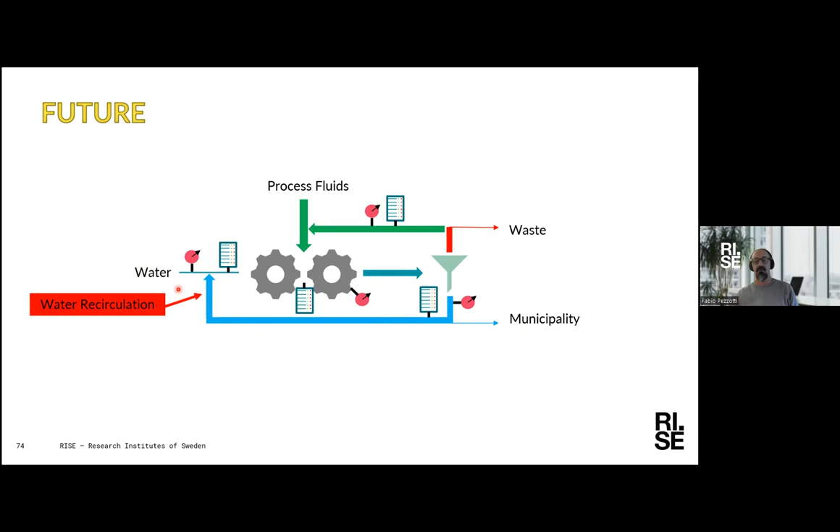For that, we want to close the loop as much as possible, recirculate as much water as possible, establish different water quality parameters and limits for different variables, and have a way of measuring these parameters either in the water treatment facilities or in the process baths.

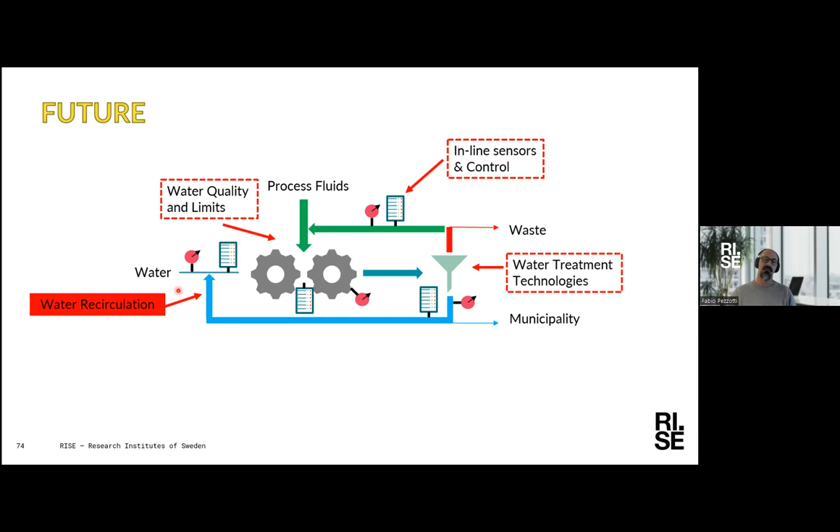And of course, the proper water treatment technologies that allow us to have the water in the quality conditions required for recirculation. Together with this, we are planning a water management guideline for other facilities or companies to start recirculating their water.

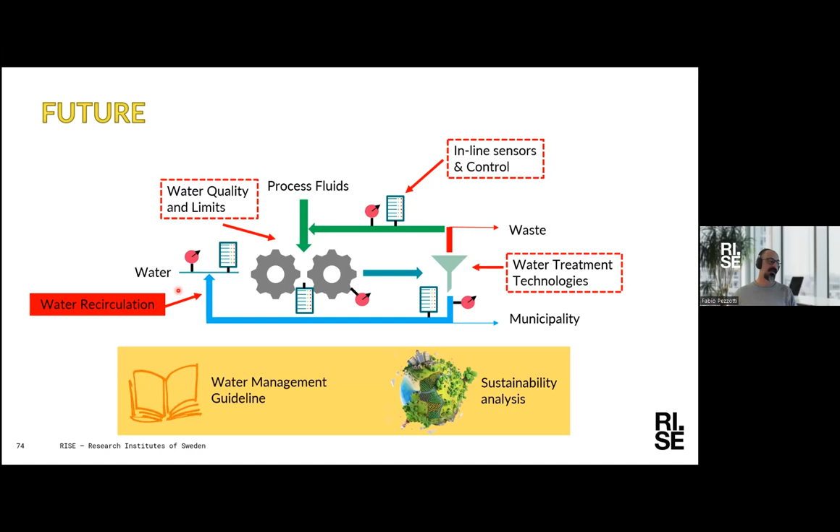Or start decreasing their consumption of tap water, and a sustainability analysis to determine the impact on the environment of all these measures.

The results expected from this stage of the project are to determine the boundaries or limits to the water quality parameters, either in the water treatment facility or in the process baths, a process optimization in a water flow perspective, and a good design or methodology for good flowing systems and equipment to find a good match within the different facilities.

To try as much as possible to have a chemical-free or biocide-free method for bacteria control, as restrictions are getting tougher in terms of the use of biocides in the industry.

To test sensors or systems that can allow us to have an inline measurement of the parameters required, and have a water management plan for assurance of the water quality.

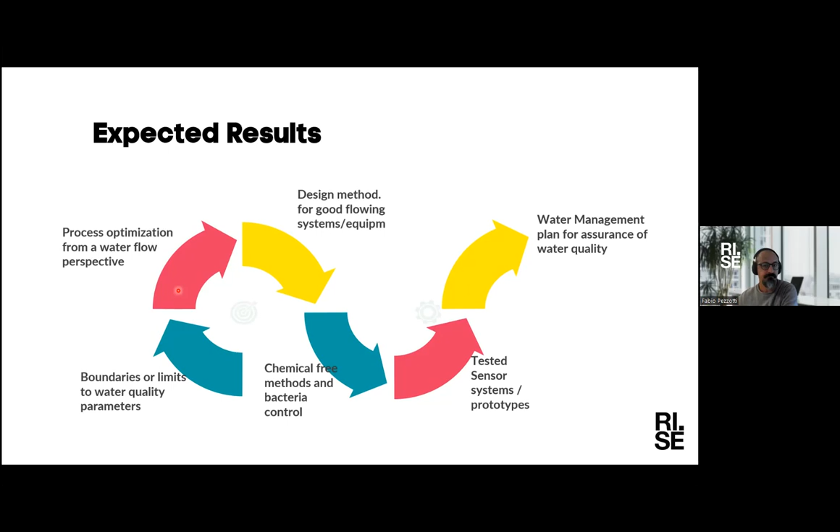I will now mention some words about another ongoing project on the topic, APPLY, where we work with an industrial atmospheric plasma treatment of plastic prior to painting.

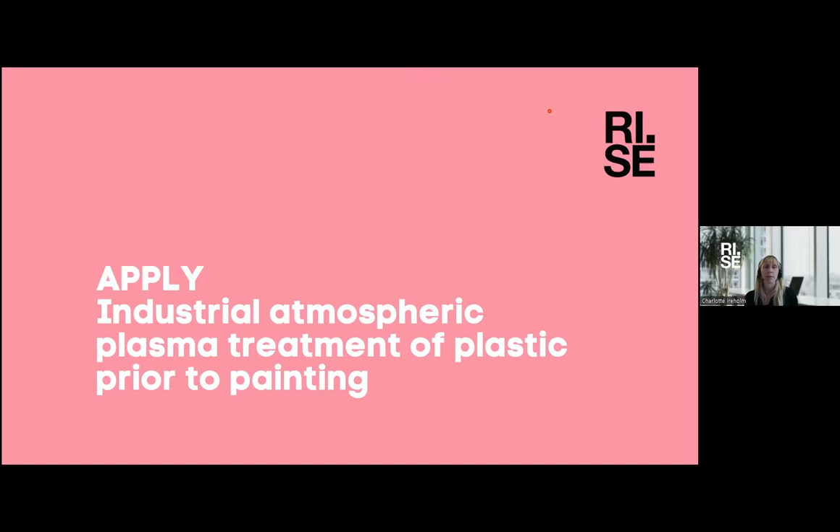It's specific, but we'll give you a picture of this cleaning method, plasma. That's why we added this. So if you take the next slide, some project data: it's also an FFI Sustainable Production 3-year project.

The aim is to replace existing cleaning or pre-treatment steps used prior to painting of plastic substrates, by using plasma, as you see on the picture to the right, where atmospheric plasma is added to a robot. I have a small film that we will look at also.

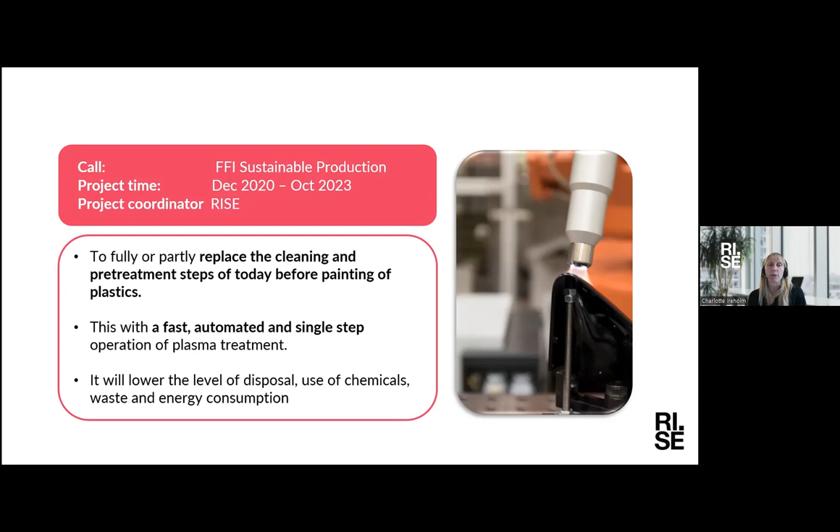By replacing these existing cleaning steps, we will lower the use of chemicals, water, and waste, and also energy consumption. So if we take the next slide, why is plasma then a good technique to use?

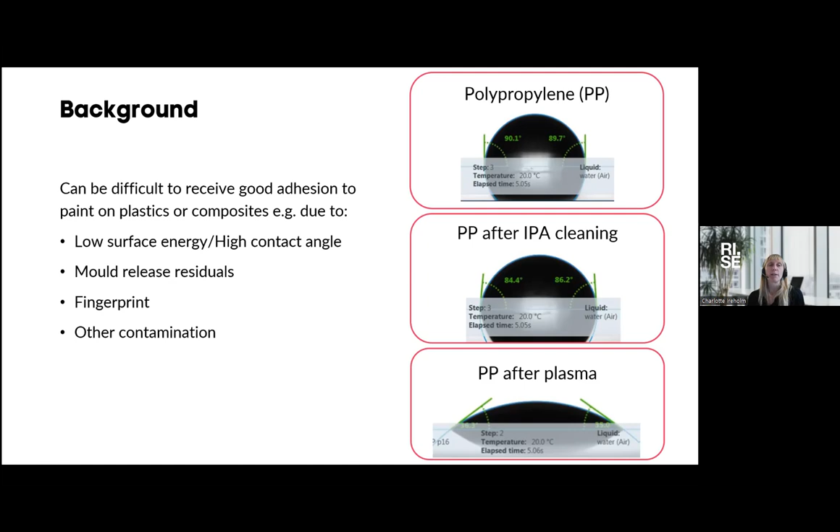As you probably know, if you want to paint on a plastic substrate, it can be difficult, due to the low surface energy the plastic has, but also there might be some residuals from the mold when you produce the plastic, and there might be other contaminations such as fingerprints or oils from handling.

And the plasma then, what is it? That's the fourth state. You have solid, liquid, gas, and then if you raise the temperature or inject even more energy, you dissociate the molecules in the gas, so it forms a plasma, which is an ionized gas, highly reactive.

The gas in this case, where we talk about atmospheric plasma, is air, and this plasma is formed in the nozzle, and in contact with the surface, this highly active plasma changes the surface. It activates the surface, opening the bonds on the surface, the carbon bonds, but it also has a cleaning effect.

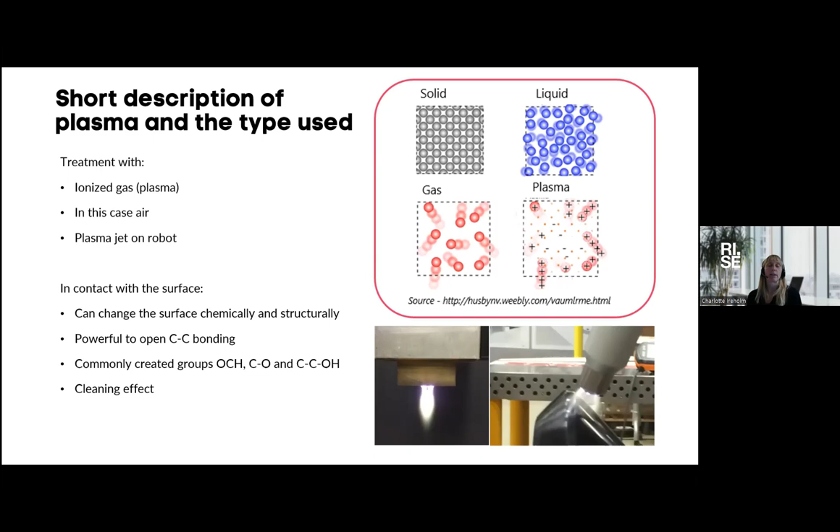So it will look something like this.

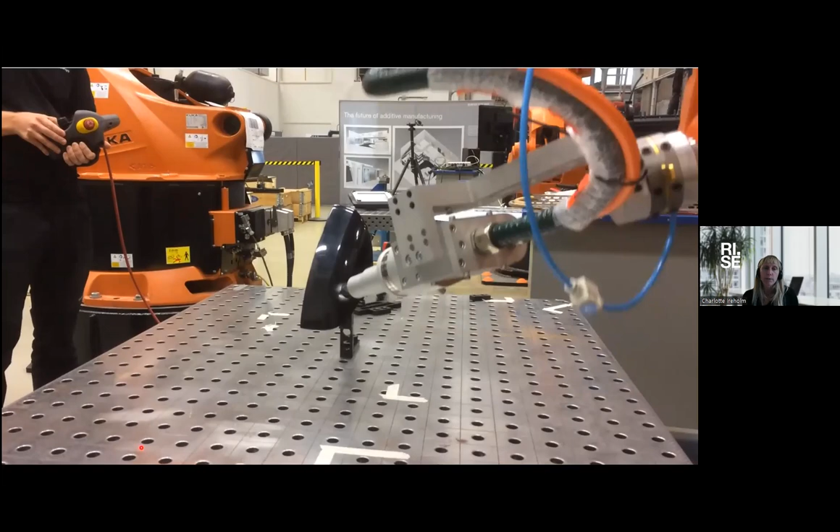I think we can maybe stop the film. I think you have the idea, and you saw it's quite a small nozzle, but if you want to treat larger parts, that is one thing we are looking into in this project: how to automate for complex and larger surfaces.

You need other types of nozzles, and you can also play with programming the robot in a smart way. That's what we work with together with these companies, an automotive industry representative, and also other industries.

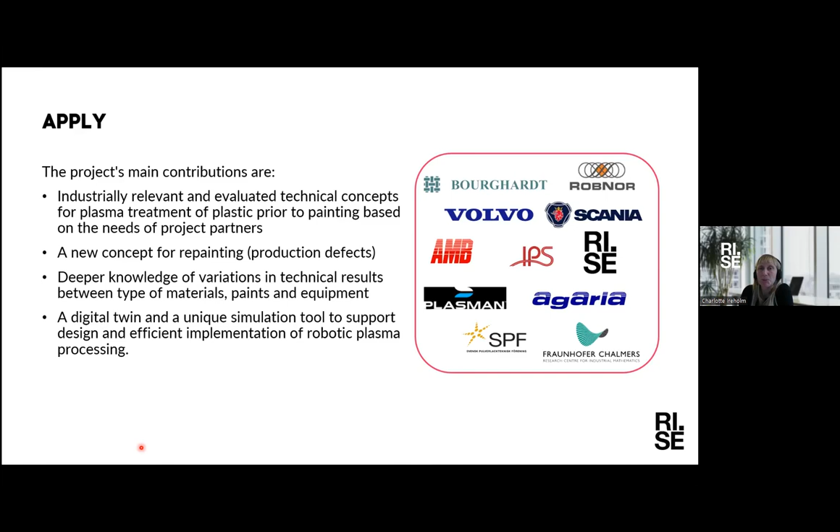So AMB, for example, producing hearing aids, small plastic parts for that, and subcontractors to the automotive industry. So that was our last slide, actually.